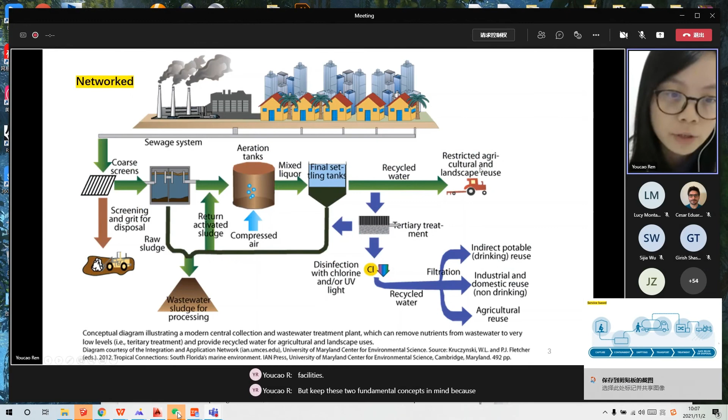But these two diagrams represent what things are supposed to be in a perfect world. In real life, we can often observe that the service chain is either not complete or there is a mixture of both. There's a shared issue in these two diagrams: they assume there is already access to sanitation. So in these two slides, a toilet is already drawn into the diagram. But in reality, that is not exactly the case, because many people in the world don't even have access to sanitation facilities. Keep these two fundamental concepts in mind, because they will be mentioned repeatedly in my presentation.

So firstly, why sanitation and why is this important? My research on urban sanitation infrastructure is responding to the United Nations Sustainable Development Goals, or the SDGs for short. This is a universal call urging all countries to jointly work towards, indicating that by the year 2030 we should achieve a better and more sustainable future. As you can tell, this is a very ambitious call because it's already the end of 2021. There are 17 SDGs in this United Nations framework, and all of them are interconnected, meaning outcomes in one goal or area will have impact on other areas.

My research largely discusses access to sanitation and water and how it triggers social conflicts and struggles. It is directly related to SDG Goal 6, which aims to ensure availability and sustainable management of water and sanitation for all. But as I mentioned, all these goals are interconnected. So my research, aside from its direct relation to SDG 6, also impacts, for example, SDG Goal 11, which concerns sustainable cities and communities. This is also relevant to SDG 10, which aims to reduce inequalities. Then if we look at SDG 3 and 5, good health and well-being, and gender equality, these all involve adequate access to sanitation and water.

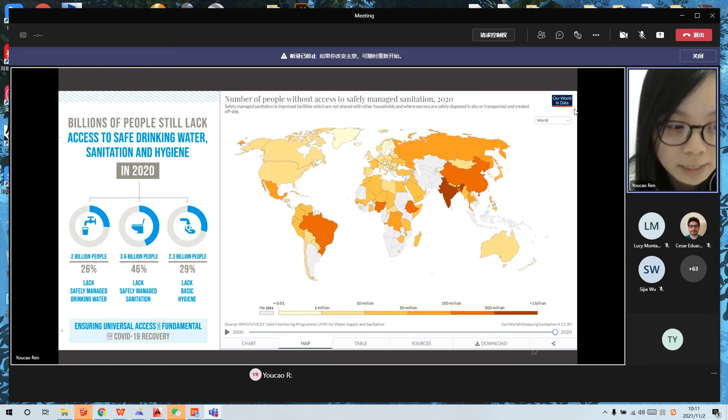Now, these are always being long-standing urban issues. However, in the year of 2020, when the global pandemic of COVID-19 happened, this has become more urgent than ever because these marginalized and disadvantaged people who do not have access to clean water and sanitation are in urgent public health risk because they cannot wash their hands properly, they cannot be quarantined properly.

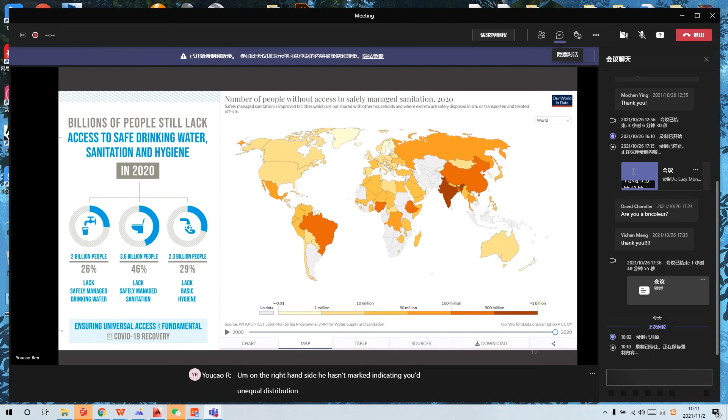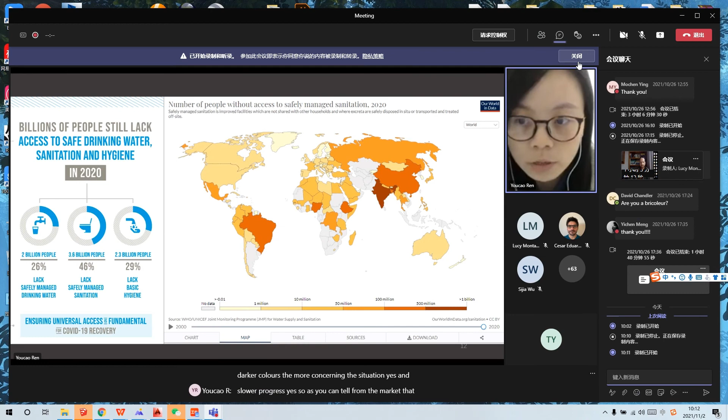On the right-hand side, here's a map indicating you the uneven distribution of access to sanitation and water. The darker the color is, the more concerning the situation is, and the slower the progress is. So as you can tell from the map that most of the global South countries are still struggling quite a lot with providing universal access to sanitation and water.

And this is why I've set my eyes on the global South cities, and in Shanghai in particular, as an instance of global South cities.

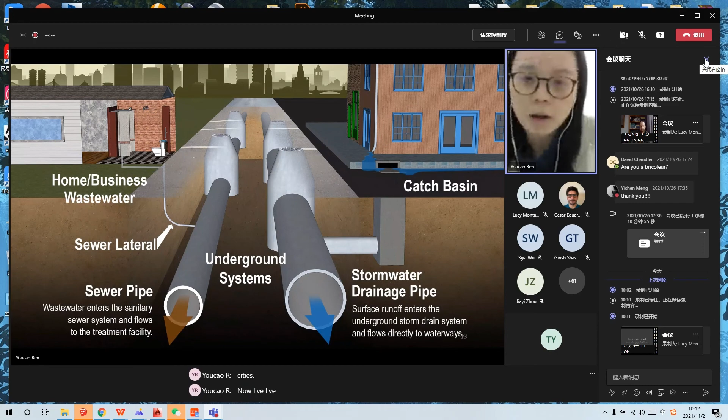Now, I've briefly talked about access to sanitation and water, either in my design studio or in my research seminar groups. Most of you, when I talk about access to sanitation and water, you look a bit puzzled, which is understandable and definitely expected. Because for most of us, sanitation infrastructure work like this.

So every network system is buried underground. It is invisible. It is the background of our everyday urban living. It only becomes visible when it breaks down, but that is very rare. But we all have access to sanitation facilities. We are all able to flush, and whatever is flushed down will be treated properly.

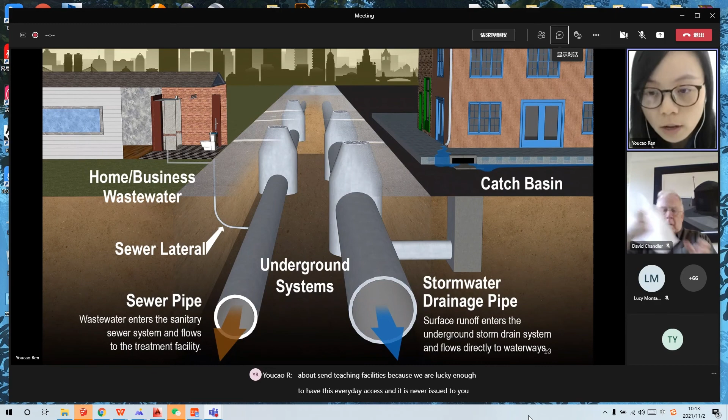That's why most of you are puzzled when I ask about sanitation facilities, because we are lucky enough to have this everyday access, and it is never an issue to use the toilet or to wash our hands even during the time of a global pandemic.

But what about the rest 46% of the global population? What about those marginalized social groups, billions of people who cannot access clean water and sanitation? How does sanitation infrastructure work in these scenarios? How can we tackle the issues? What can we do to improve the service and to help with public health and individual urban living experience?

Now, that's a lot of questions, and I have to admit that I do not have answers to all of these questions. I only have answers to a very small portion of these questions. But in today's presentation, I hope that my narrative can help you start thinking about these questions, and in the upcoming decades of times, as an urban researcher and designers, you can always bear these questions in mind.

Now, whenever I have a chance, I tend to promote my research project a little bit. So my work is part of the international project of SASI, which look at sanitation transformation in Shanghai as an example of global south megacities. I've attached the website of SASI here on the slide. So if you're interested, do visit our website.

We do not only look at China or Shanghai. We also have parallel sister program in India and Brazil, both taken as representatives of global south countries. So if you're interested, every information is on the website. Now let's talk a little bit about Shanghai and why we choose it.

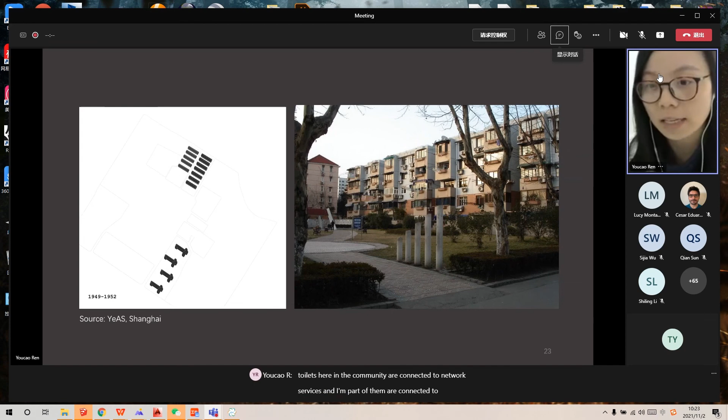A different scenario is an urban environment developed between the early communist era and the year 2000. Here I'm looking at a mix of networked system and human service-based sanitation, meaning parts of the toilets in the community are connected to the network sewer system, and parts are connected to septic tanks that need to be emptied regularly by municipal service. My questions here lean towards whether this mix of network and service-based systems can achieve sustainability in a dense, transforming environment.

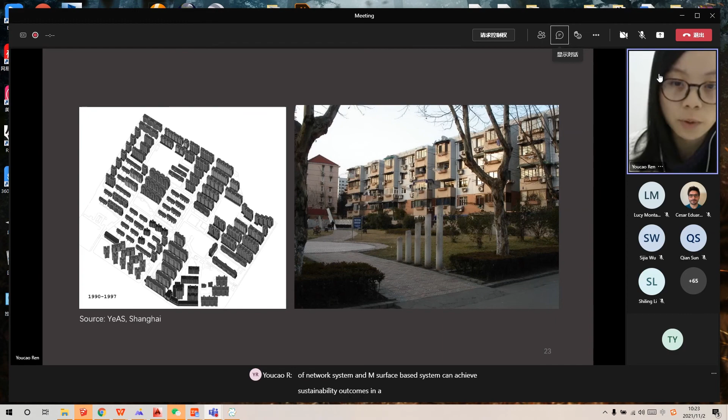My questions differ again when I look at a different urban typology, shown here on this slide: yet-to-be-transformed urban environments that, before the year 2000, used to accommodate 65% of Shanghai's overall population. After 2000, many of them have been demolished and redeveloped into more modernized high-rise typologies, though it still remains commonly seen in inner Shanghai, and tens of thousands of people's everyday life are still accommodated by this typology. This is what old Shanghai everyday living looks like in these areas.

When looking at this scenario, my questions are again different from the previous two, and my current research is very much centered around inequalities triggered by inadequate access to sanitation. Let me explain my study site more to give context. These yet-to-be-transformed urban typologies now largely accommodate two kinds of social groups.

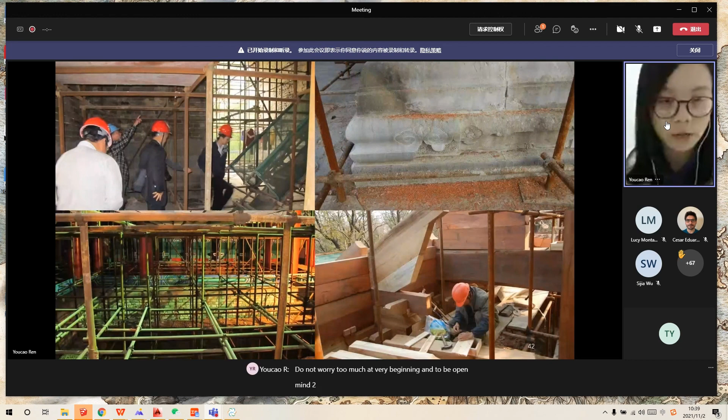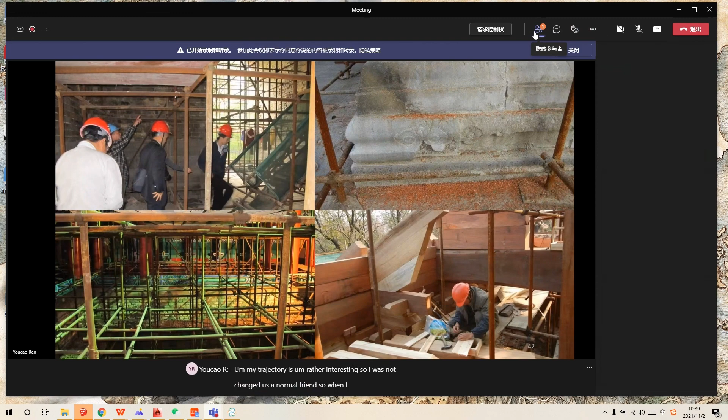So this is my first research job. I graduated from my postgraduate studies back in Sheffield, and I was appointed to evaluate and archive different architectural repairment and preservation practices in China's World Heritage Sites. I was considered a member among the professional team - if we look at the first picture here, I was among this group. We wore decent clothes and visited these World Heritage sites that were currently being repaired, probably once or twice every month.

And we evaluate the work that has been done to these sites, and we write down the evaluation report to judge if these are being appropriately practiced or not.

However, in my work, I've grown fond of observing the workers and craftsmen doing this repair and preservation. If you look carefully at picture number 1, you can see the clothes of the workers and craftsmen hanging out in the World Heritage Site. Compared to us, who only visit these sites once or twice a month, they live on site every day.

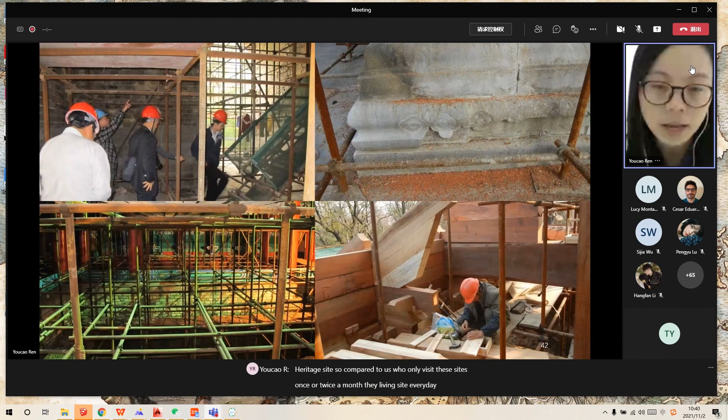Repairing World Heritage Site architecture is an integral part of their everyday life. Knowledge and experience are shared among workers and craftsmen in a different way than we share knowledge among so-called professionals. That's when I first became interested in doing ethnography of these practitioners and craftsmen instead of the very formal professionals. Then in my PhD, I looked at Eastern China's rural to urban transformation.

So this is how I came to be an urban ethnographer, and how I try to be clear about my identity as a previous urban designer and now an urban researcher. I think this is somewhat helpful to you when you're scoping down your research interests and trying to establish your own identity as a first-time researcher.

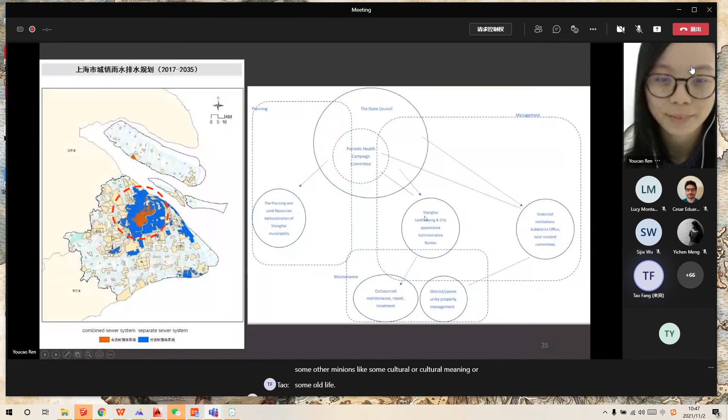Hello, this is Tao Fang. For this part, the urban research part, I want to ask, because you mentioned some of these buildings have been demolished and transferred to high-rise development. Yeah, this is one typology, and I think why those buildings remain there is some other meaning, like cultural meaning or old lifestyle meaning. So do they have another typology to show how to develop this quality, based on those typologies, and maybe improve the life quality, like adding toilets in different houses - not many houses sharing one, but maybe one house has one toilet - like those developments?

Yes, brilliant question, this is definitely a brilliant question. So I thought about including a slide to show some of the redevelopment programs that the Shanghai government has been pushing in recent years that aim to increase sanitation access in these yet-to-be-transformed urban typologies. But then I thought that deserves a whole other presentation, that's just a lot of information, so I did not actually include that slide.

But spot on question. The Shanghai government is thinking about possibilities of preserving some of these massive yet-to-be-transformed urban areas by increasing sanitation access in-house. One of the practices they're currently experimenting with in inner Shanghai is demolishing these old houses but rebuilding new houses that look almost exactly identical to the old ones on the original site, so that urban fabric or historical typology is preserved.